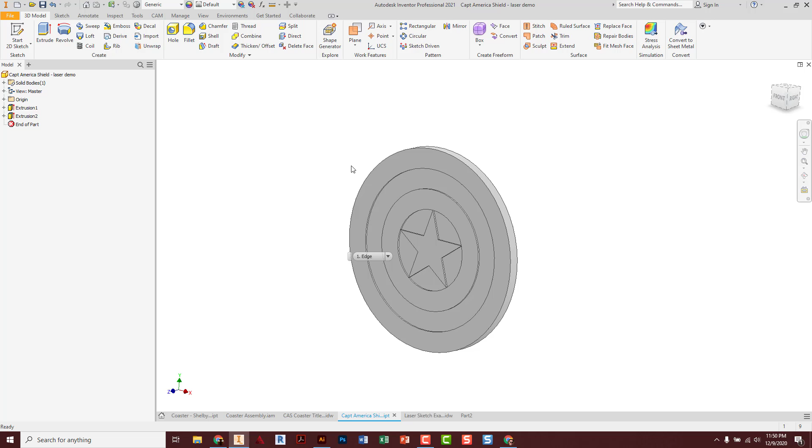Jumping back to Inventor, there are two main ways to do this. You're going to either model what you want to laser. Here I've got a Captain America shield - I drew my circle first, then sketched on the surface and got my rings and star defined. It's an okay preview, but it would be nice if I could darken in where the laser might be burning to help me see that.

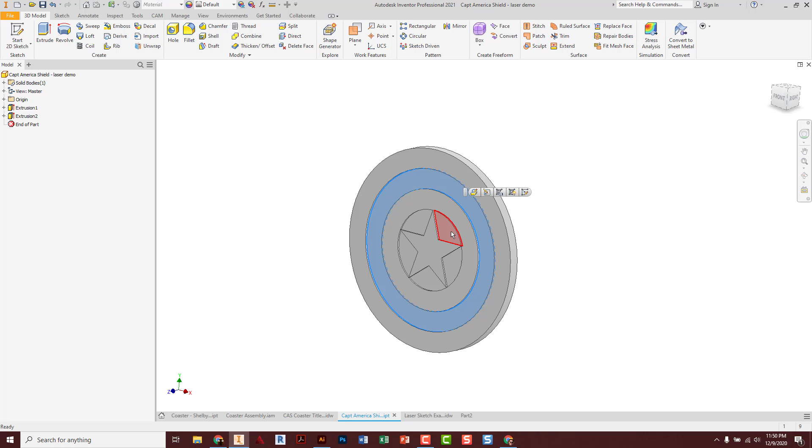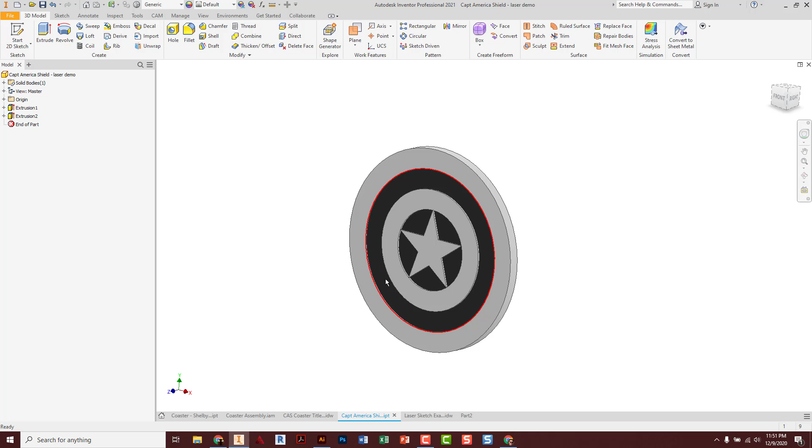You can change surface colors by left clicking on them. I'm going to hold the shift key and highlight all these surfaces, then right click and go to properties, and change the appearance to rubber black. I know from experience that's a good color that doesn't have any glossy look to it, just to show you what that might look like once it's engraved.

Just a little easier to see - it actually kind of previews what we have to do in a drawing shortly. So once you've done your work to prep your part and get the engraving to look the way you want as a part model, now we're ready to document that.

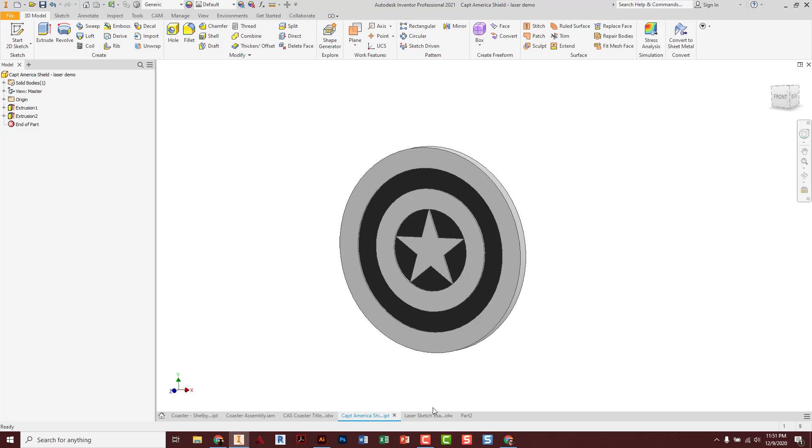So we go over to an IDW file - I pre-started this to save time, file new, all that stuff. It doesn't matter which one you pick, because as soon as you open this up and change it - this one's a B size - you're going to delete the border and title block. Right click delete, right click delete, because whatever is on the piece of paper would get lasered. If I leave the border and title block, it would all get lasered out down the road, and we don't want that.

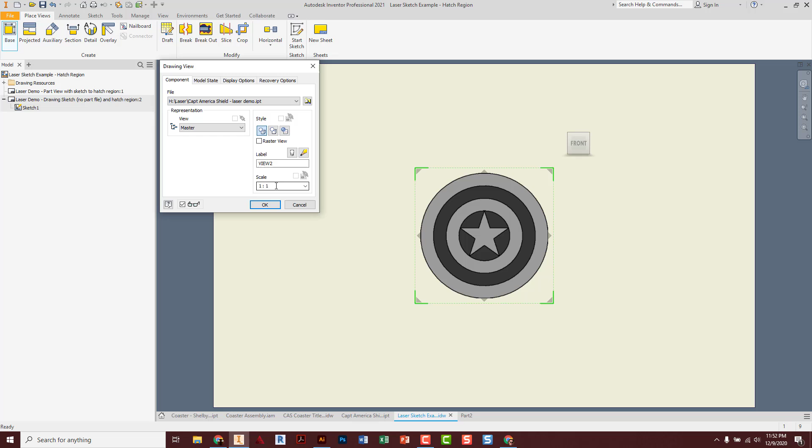All right, so I've got a nice blank piece of paper here. We're going to go base view - there's the Captain America shield, it's 1:1 scale. You could resize it at this point if you wanted, but usually you model everything the way you want. So I click OK, and this is the view I have. I'm just going to move it up in the corner a little bit, because if this is my piece of material - wood or plastic - that I'm lasering, I want to work in the corners and not just cut holes out of the middle of things.

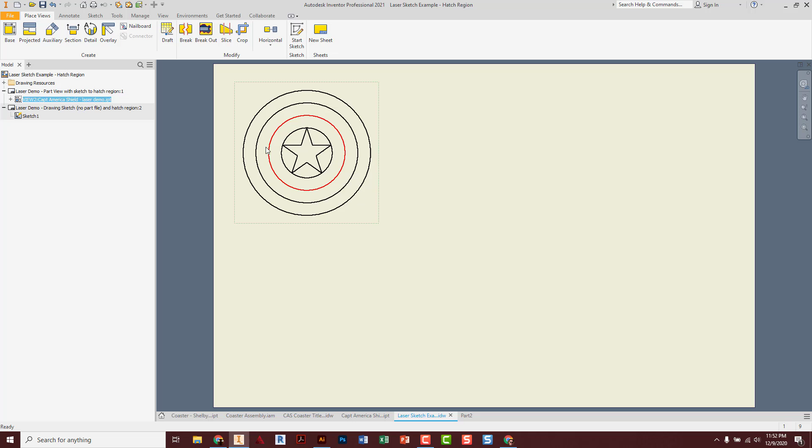This looks good, except I need to darken in those areas again where I want to engrave the black to make that shield look right. So what you have to do is click on the view - I always try to click specifically right on the dotted line, the dotted box around the view - and press the S key.

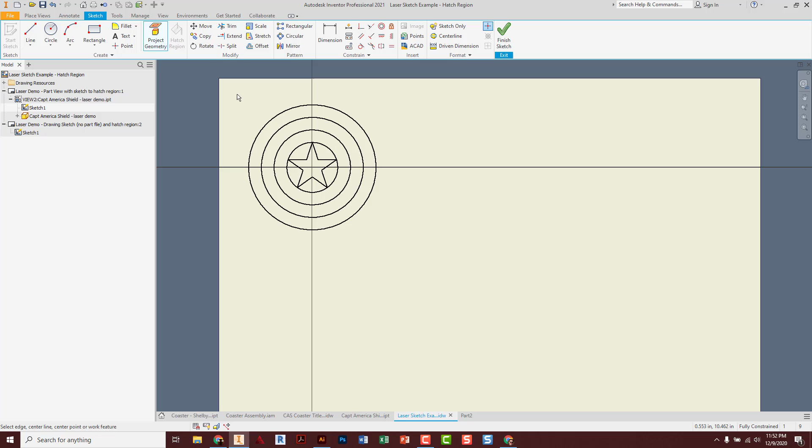So we clicked on the view to highlight and select it, and I press S for sketch to assign a sketch to that view. I know the sketch belongs to the view because it's centered on that view box. Now once I'm in here, I go to project geometry, drag a box around everything, and right click OK.

That lets me reference all that information, and now I can use hatch region to fill in areas, changing the areas that I want to laser engrave black. Don't worry, I'll change the pattern in a minute.

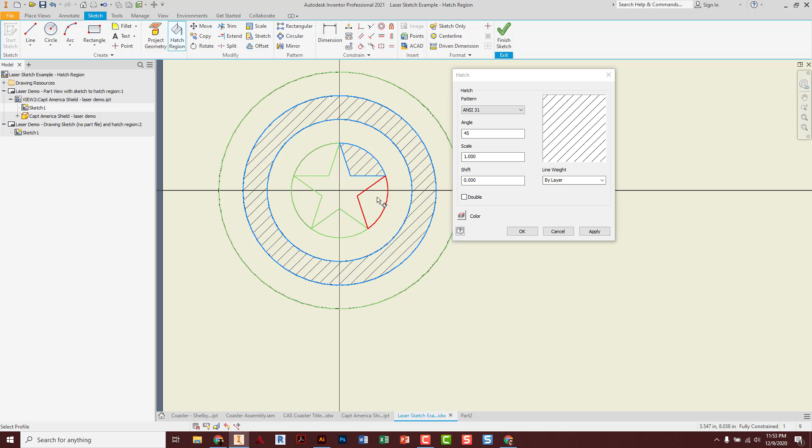Be slow with your selection sometimes, it takes a second to snap where it wants to fill. If you ever have issues where it won't select, just hover for a couple seconds, use the drop arrow, and make your other selection.

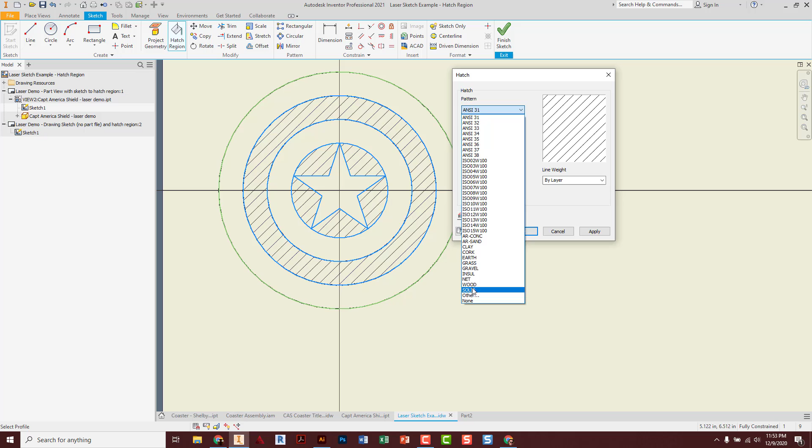Once everything's selected that I want, I'm going to change my pattern to solid. You probably could have changed that right away, I guess. Then I'm going to change the color, make sure it's set to black. That's good, and there we go.

Okay, we're done with that tool, finish sketch, and there you have it. Your base view of your real part is now shaded in where you want it to engrave.

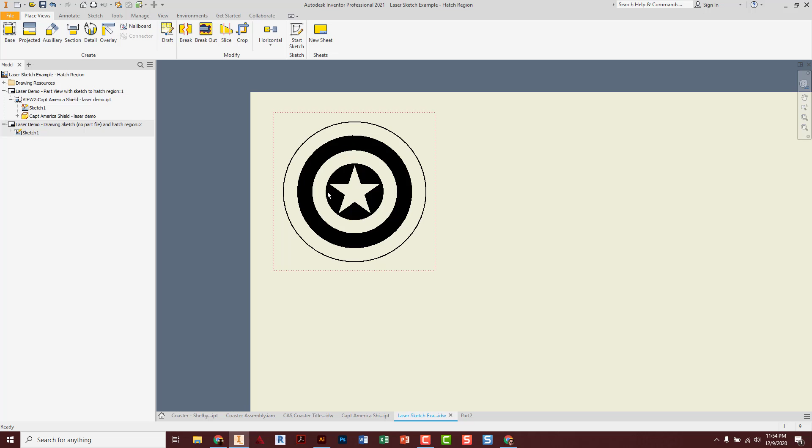We can worry about line weights in a little bit, but we need very thin line weights where I want to cut it, which on this edge I'm going to cut. Everything else just gets engraved to mark it out.

So that's one way, and then from here I would go File, Export, PDF, and save it where I need to.

So that's one way. You actually make the parts, you model the parts, all the parts and pieces you need to build an assembly or some real object you're making. Maybe it's a little box that would look like, I have a few examples here.

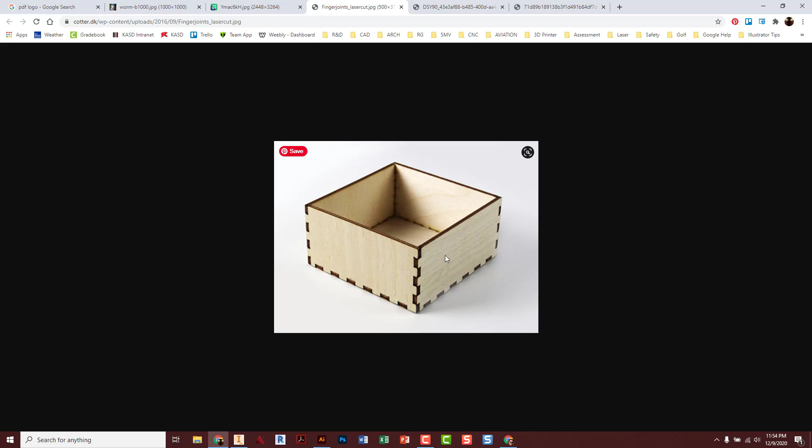Maybe it's a little box that looks like this, where you'd model every individual part. You build the assembly to make sure it's going together the way you want. We practice virtually so we don't waste the material when we actually make it.

But then you need to do a base view of each part, unless some of these sides are the same the way they fit together. You would make a base view for each one and laser out every piece.

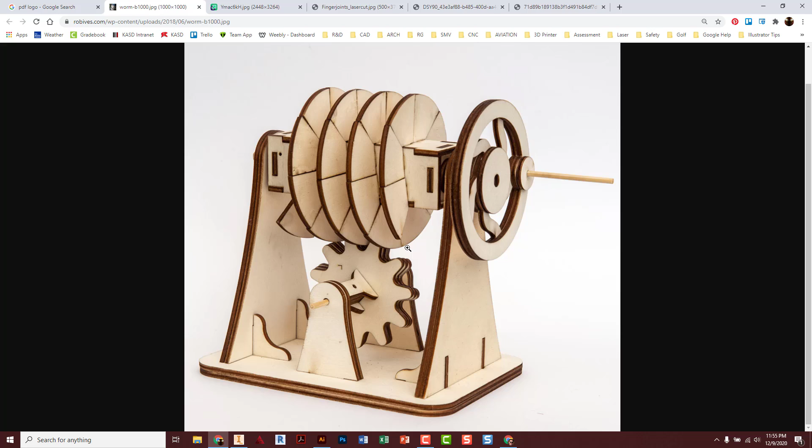And of course, some things could be way more complicated like this. You'd have lots of parts and pieces, but again, that's why modeling in Inventor is really important and very useful.

If you just have a quick, simple object, or even if it's going to be like a name or a sign or a plaque, what you can do is, when you're on a blank piece of paper, press S on the keyboard, and now you have a sketch that belongs to that sheet of paper, and you can just start drawing. That's a little different than how the sketch belonged to the view on that Captain America shield.

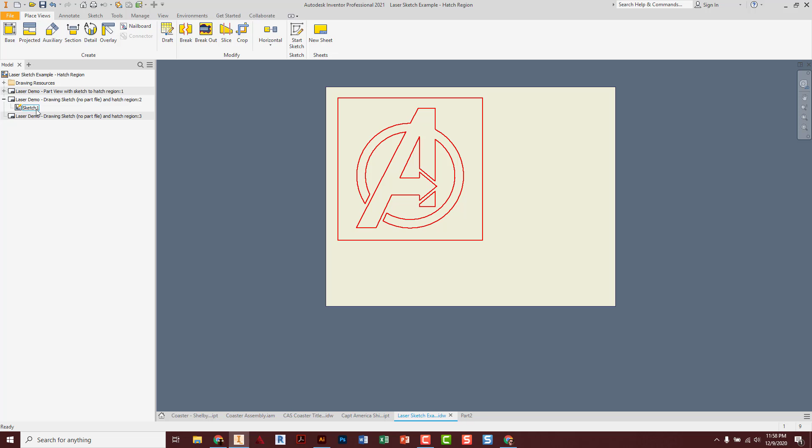So what I did to save a little time is I drew the Avenger logo in this sketch that belonged to this piece of paper, and I used dimensions and everything you can see to make it look right. I can go in here and hatch region again too, and fill this all in.

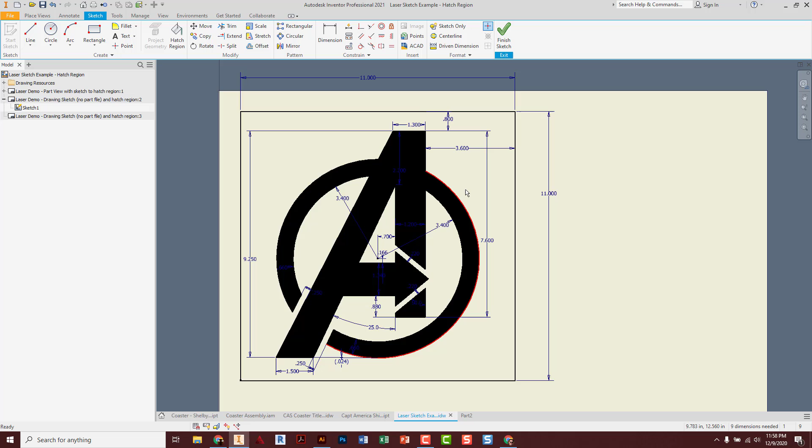Give it the solid look, black, okay, and yep, I like the logo. I hit finish sketch, and see all the dimensions go away and everything. It's nice—handy to sketch on here as well sometimes.

I want this box on purpose around the logo because I'm actually going to convert this to a thin line weight so it cuts, and I'll have this cool little plaque of the Avengers when I'm done.

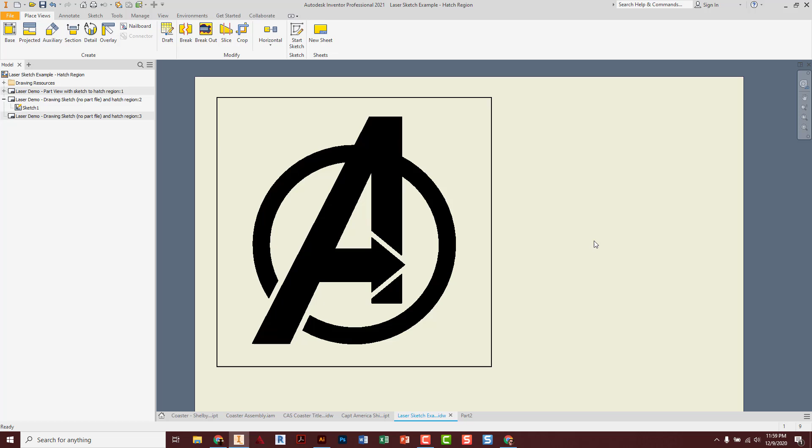So again, if I sketch on the sheet of paper and get the logo or the name or whatever it is I want, and everything looks great, you just File, Export, PDF, and that's step one of getting to the laser. The next video will show you how to run Illustrator with the PDFs you just created. So jump over to that one, and I'll see you in a bit.